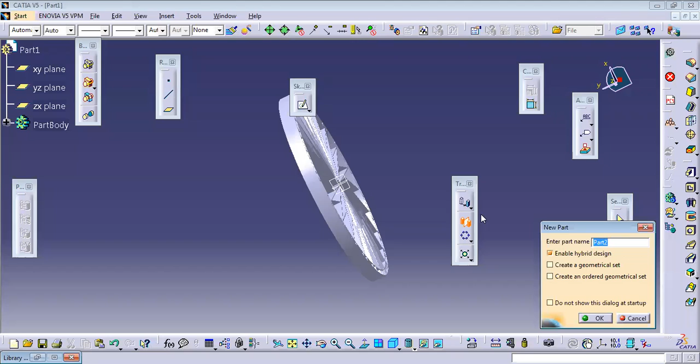What we can do? So let's go for one more diagram. Mechanical design, part design, new part. We'll select any one plane, I'm selecting vertical plane. Go to sketch, and draw one arc-like structure.

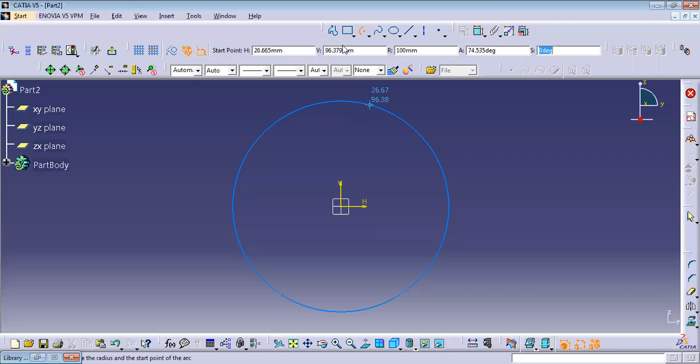Center point. Define the arc, radius let's take 100. You can give your values here. It is 45 degrees, my dear students. Wherever you want, you can place the arc, then complete the profile however you want.

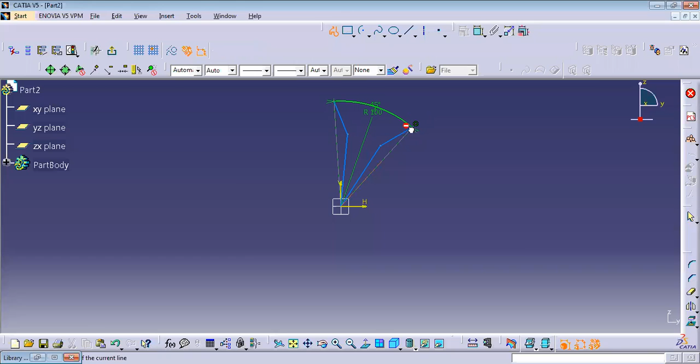Then exit from the workbench. Go to the pad option. Preview, okay, then click this.

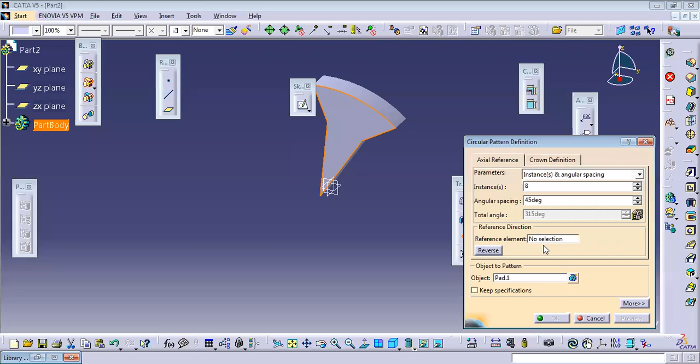Go to the circular pattern. After circular pattern, let's make 45 degrees there. Then 360 divided by 45 is approximately 8. Reference axis selection, you can go for reference axis. Preview, okay, done. So according to our wish, we can do this.

Now, my dear students, so this is circular pattern. Instead of circular pattern, you can also go for rectangular patterns, so go for rectangular pattern.

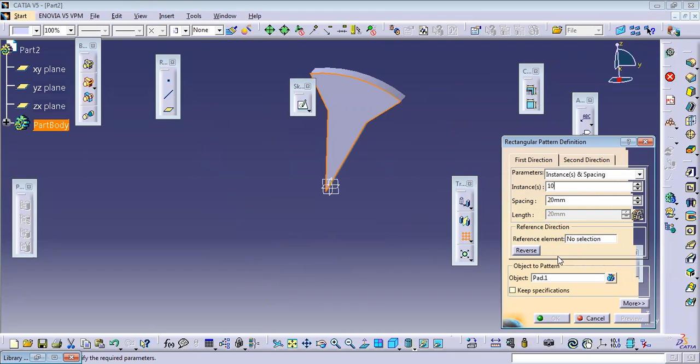How many you want? You want 10, okay go for 10. Reference element, this one you want 10 items. So preview. So 10 items are ready right now. Instead of making one item, 10 are ready. Reverse direction, you can change in this direction. Preview.

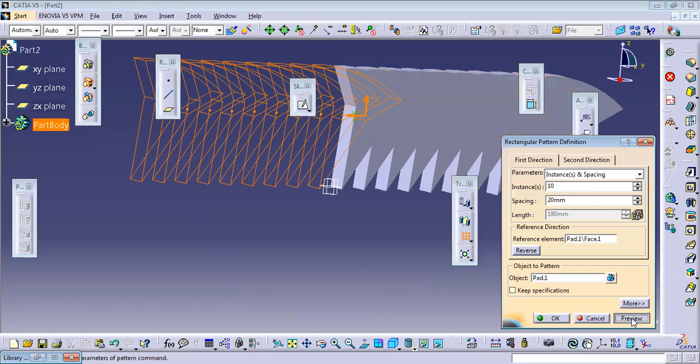Okay, so this is like we can do. Now, my dear students, plenty of options are there. Groove making option is also available, you can use this one. Just try it out whenever you want.

So now I will be going to this table. We'll be discussing about this table. After this, we'll go for assembly.

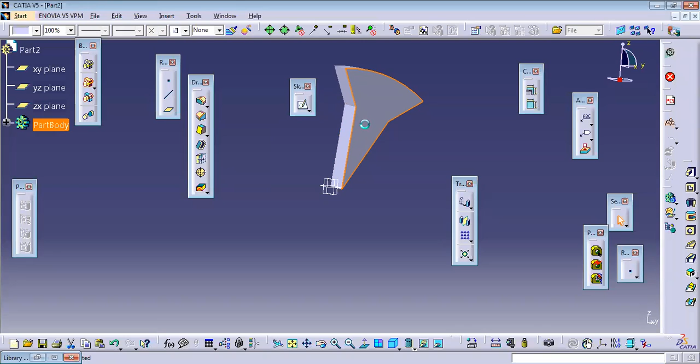Okay, now what I do, my dear students, I'll make one box to get to know the chamfering application. I'll make one box first. Select any one plane, go to the sketcher, make one rectangle of any dimensions. Don't worry about the dimension much right now.

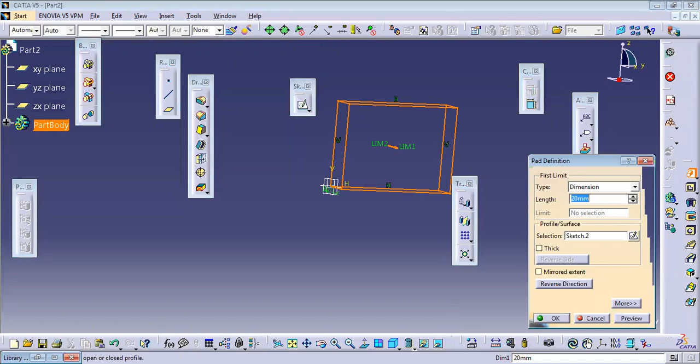Return to the workbench. Pad it, my dear students. Let's go to the thickness 100 mm. Okay, now the box is ready.

Now what you can do here, lot of chamfering options are available. So select this one, edge fillet. What it does is take all the edges. You can select all the edges whichever you want, or you can select any one edge. After selection of this, okay.

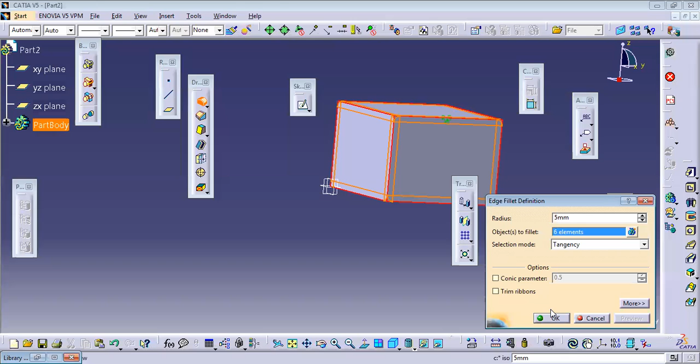So if you want to reduce the sharp edges that are there, you can remove the sharp edge. For example, preview, okay, you can increase the radius of this one. First you go for the preview, my dear students, you will get to know. Okay, so can you feel that one?

What we have done? Can you feel this one, my dear students? What we have done? The cuboid - cuboid is fine, but after making the cuboid, what have we done? The edges, whatever sharp edges we were having, we have removed here. Getting it? Yes sir. So you need to remember one thing: any mechanical component or any automobile component, whenever you are making it, you must remove the sharp edges.

Okay, now there is one more option, my dear students. Again I'll go for the earlier model. After making this earlier model, there is one more option here: chamfer.

What does chamfer do? So let's take this one. You can select any plane. So chamfer, angle 45 degrees, 2 elements, preview. I'll increase this one instead of 1mm, I'll go for 10mm. We can easily feel that.

Okay, so are you observing that one? So what have we done now? Whatever sharp edges are there, we cut them, we did the cut action such a way as corner edge cutting. Let's take one more example.

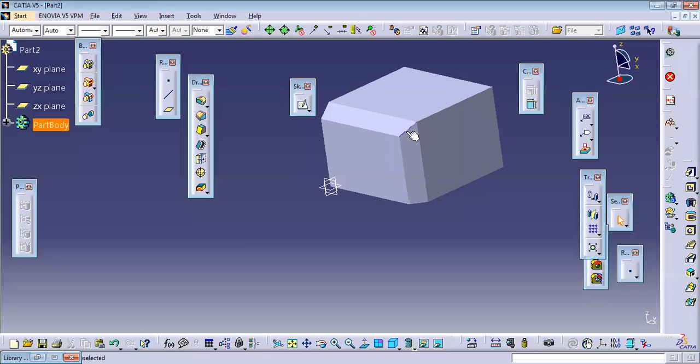I select this plane, I'll go for the chamfer option. I will give, instead of 1, I'll give 5mm. Whatever you want, you can give based on your application. Now, okay. Are you able to get to know what I did here? So this is called chamfering - edge removing, edge removing. Okay.

Fine, now we have one more option. We have one more option: draft angle and different draft angles. One I'll go, so one draft angle I'll go.

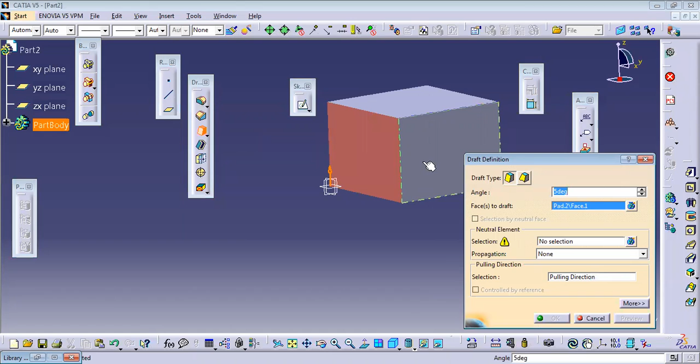So select this one. After selection, select any surface, whichever surface you want. You can select all 4 surfaces here, just by rotating. Then it makes the shape of shape.

For example, you increase that 5 degrees to 10 degrees, so you will get to know. And axis direction is in this. Select the section, so in above direction.

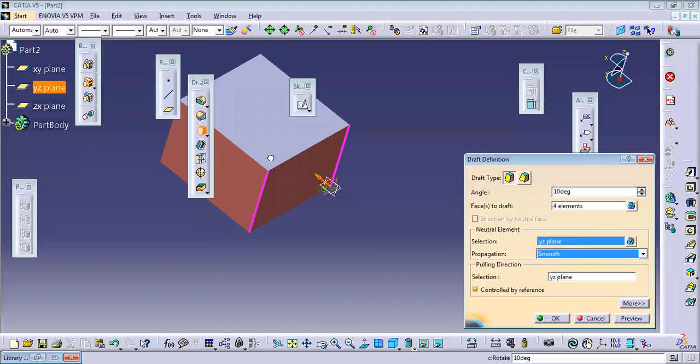Okay, then we preview. Selection, 4 elements are selected, faces to be draft. Now all the 4 reference plane. So select this one, instead of XY plane you select this one. So first 4 elements we selected, and reference plane, base plane we need to select, then go for preview.

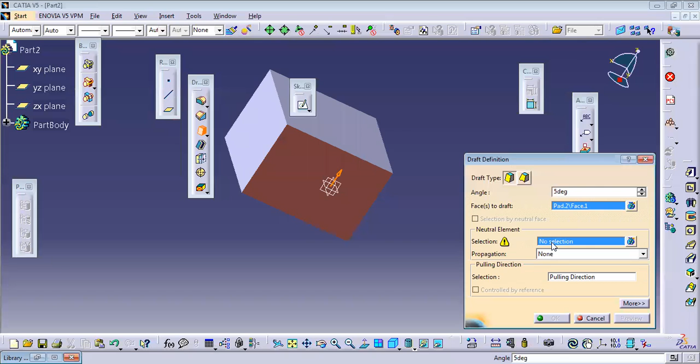Once again I'll go. Okay, one element selection, this element I'll go. Preview. Okay, what happens, 1 second. You already drafted, okay fine. So probably you can observe this one, its cross section has reduced. Tapering achieved. 1 second, I will give more drafting so you can feel that one.

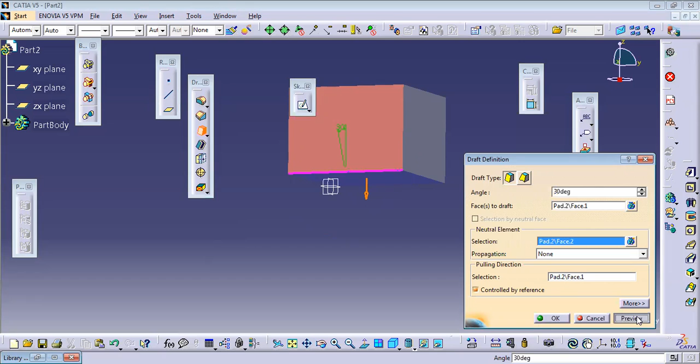Okay, select, you just observe the shape. This is completely vertical. Now what I do, I will select this bottom part, and both part, this part is going to be reduced by 5 degree. Instead of 5 degree, I will give more, 30 degree, so that it is clearly visible for you. Preview. Okay done, so you get to know that, right? So what we have done now, so it cuts the faces.

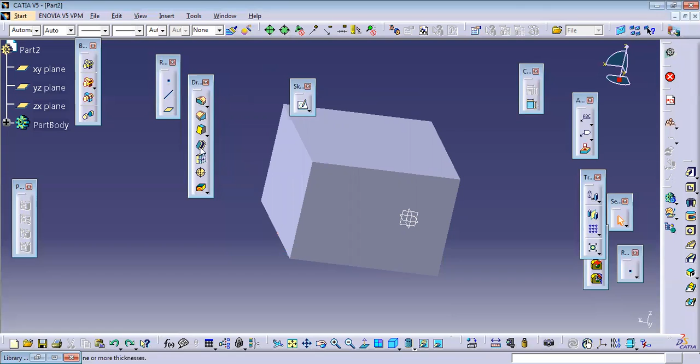Okay, then we have one more option, this option. This is shell making. Shell making is nothing but bucket-like structure making. For example, you take this one, select this one, faces to be removed. You can select any one. All if you want, you can select all. So it's better if you selected one only.

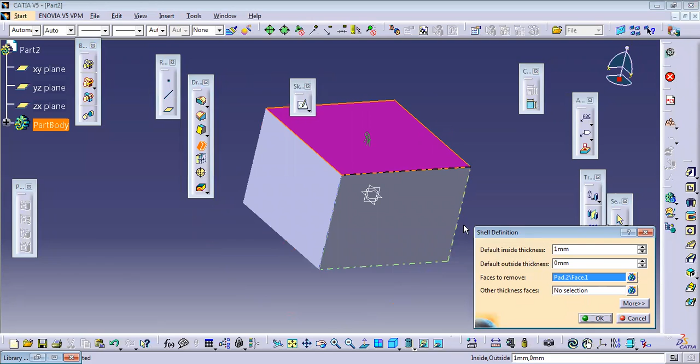One. Okay, you select any surface, go for preview. Then automatically we can get the hollow section. Select any one plane, and that makes the thickness of 1 mm. Why 1 mm? We have given 1 mm. 1 second, I will show.

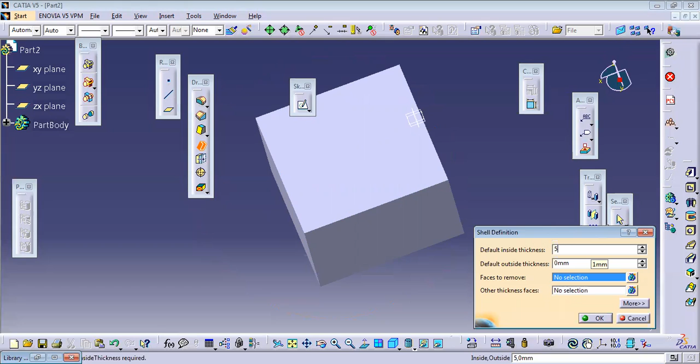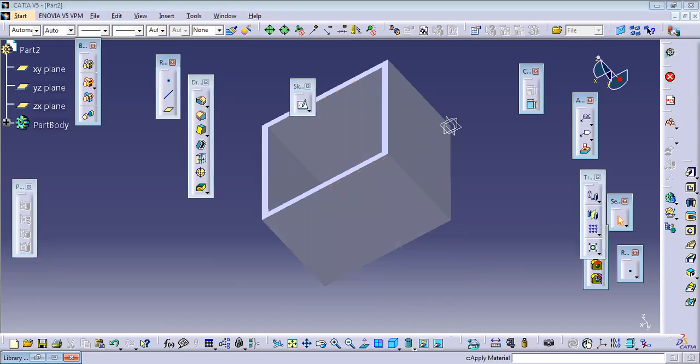So select this one. After selection, shell options, instead of 1 mm I am giving 5 mm. Faces to be removed, these faces I'm going to remove. You can select any one plane based on your application. Now you can fill this one. If you want, you can give the material also for this, currently material option is not working, but you can give the material also.

Now there is one more option, this one, thickness. If you want to increase the thickness of this to more than 1 mm, just 10 mm for only this particular wall, you can give now. So how we can give? There is option, thickness option. Click this, after clicking you select any surface and give the dimension 12. Okay, 12 mm thickness is achieved.

Okay, like this, if you start working on this you can do whatever you want, whatever the shape you want. You can make the bike simple component I have explained here, but you need to go for any. You can make the bike chassis, you can make the wheels, you can make all the components.

Okay, one more thing I am telling you. For example, now I want to make one vertical surface but inclined. For example, what I do first, I create the plane. So look at here, one more option, plane. This is very important.

So select this option, look at this option, wave here, I'm using this one. Now important is plane. Plane option, whenever you select this plane, there are plenty of plane options available: parallel through point, angle normal to planes, through 3 points, through 2 lines, through point and line, through planar curve, tangent to surface, normal curve, equation, mean through points. All are there, you can try all.

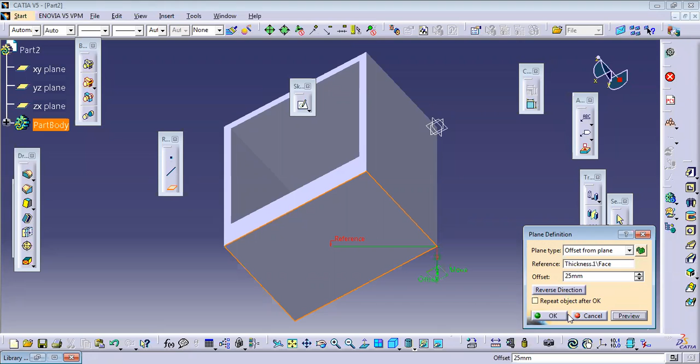Now okay, now one more plane has been created. You can use this as a reference and you can go for the sketching. So how I will tell you. Now one more plane is selected. Draw any component you want.

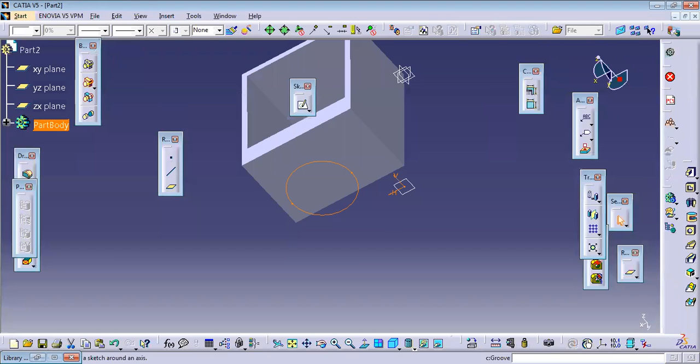Wherever you want. Exit from workbench. When you exit from workbench, you can go for the pad option or cutout option.

Preview. So not only these 3 planes, we can create any number of planes. For example, here you can create the planes. Let me know.

Here you can see whether it is possible or not. Now create the plane. Angle normal to the plane or parallel through point.

So you can select any one. Normal to the curve, I have selected. So curve is available here. Okay, curve is available. Point is not available.

You can make the point if you want. Here, one point you can click. So point is available. Now on which point is created, then plane, reference offset plane. So what I'm selecting, normal to the curve, I have selected here.

Okay, and point, if you want already drawn point, somewhere it has gone. So once again I'm drawing point, my dear students here. Okay, fine. So point is available here.

You can observe here plus mark, point is available. Okay, now draw the plane.

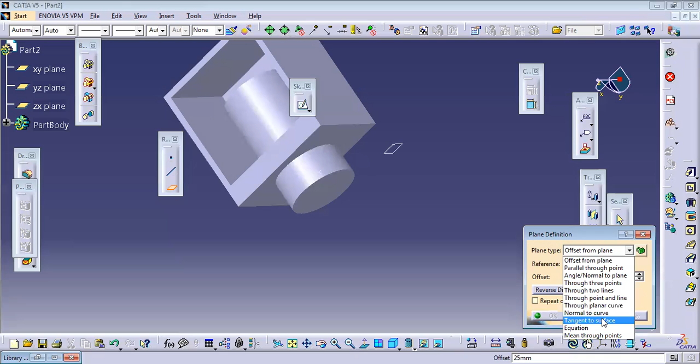Curve, normal to curve. So reference surface, point you want. You can select the point. So point is ready and preview the point.

Now what is the use of this point curve? So this plane we can take as a reference, we can draw. There are some complex mechanical shapes available. For this, this tool is going to be helpful.

For example, let's sketch on this plane. So plane is available. Draw one more circle wherever you want. You can give a radius

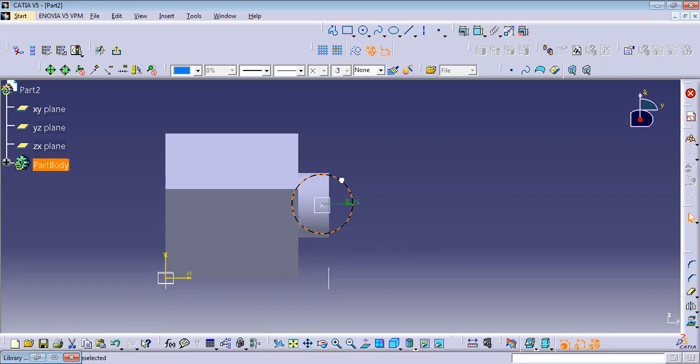25. You can give one radius of 25 too. Okay.

Then return to workbench. Return to, you can use the pad option or cut option. I'll go for cut option now. Preview. More than 100 mm we can give. Reverse direction you can select.

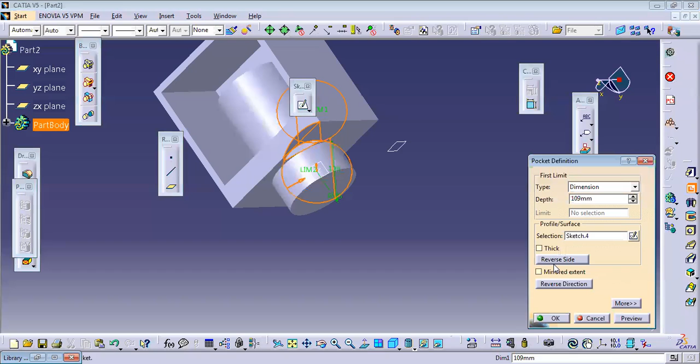So this plane has helped us to make the plane on this surface. So this is one of the options. So these are the fundamental options, my dear students.

You can use any number of operations, even Boolean operations are available. Mirror option is available. So mirror option already informed you. Let's go for mirror option.

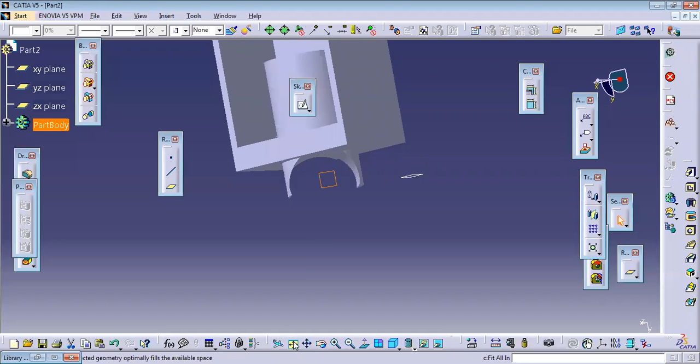So there is a mirror option, my dear students. You can select the mirror option. Select the component distance, how much distance you want. 3 mm distance. Okay, 24 mm distance I have given.

So fit to screen. So it has to be done. Oh yeah, I don't know why it has not done. So what, once again I will use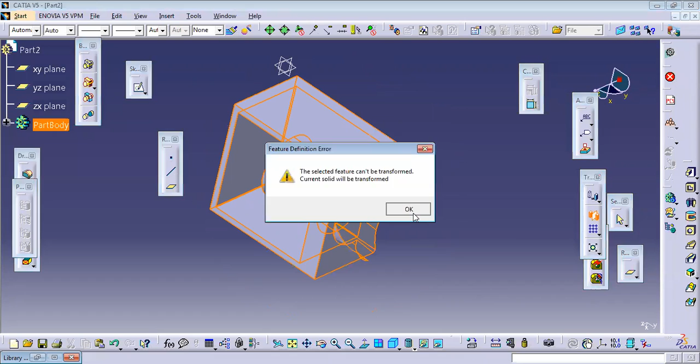mirror option. Mirror option. Okay, this is a transformation option used. Mirror option. Select this component. Select the component. Mirror option already done. First you select this component, then mirror option.

So immediately we have done the same component too. Before assembly, my dear students, suppose if you want to change the pic, if you want to take the picture. Okay, so image.

You can make, image is available. Capture it. After capturing, after selecting, we get this option. Click this one. Our image is going to be generated.

Whatever we have. Again, in image there are plenty of image type options available. You can use those things. See, left corner you can check that one. Left corner you can check the image is available, you can save it.

Okay, is that okay? Are you listening, my dear students? Are you listening? Yes, sir. Okay, yes, sir.

Fine. My dear students, along with this, for example, there are plenty of crazes as well. For example, few students make a video of their component making. If you want to make the video, again go to the tool option.

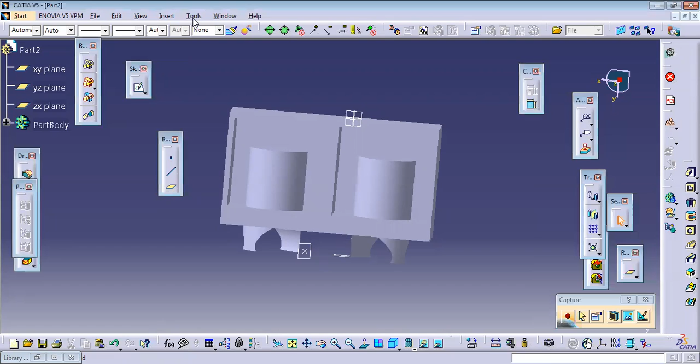Again go to the tool option. Okay, image, there is album available, video is available. Click on video, you will get one more video recorder available. Click on video recorder, and you start making the component whatever you want.

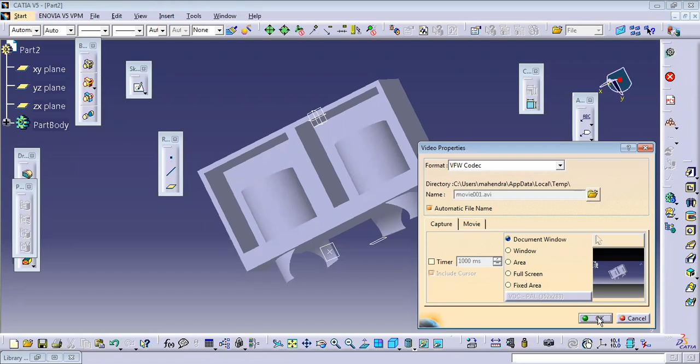You just work on the screen, it is going to be recorded. Okay, then stop it, automatically it saves in your drive. It gives options: Windows complete area, particular area, full screen, fixed area. You can select any one and click OK. Complete screen, or only component screen, or only CATIA screen - it asks the question like that.

Fine, my dear students. Now what I will tell you is that we need to do assembly. So after making components like this, you can make any n number of components.

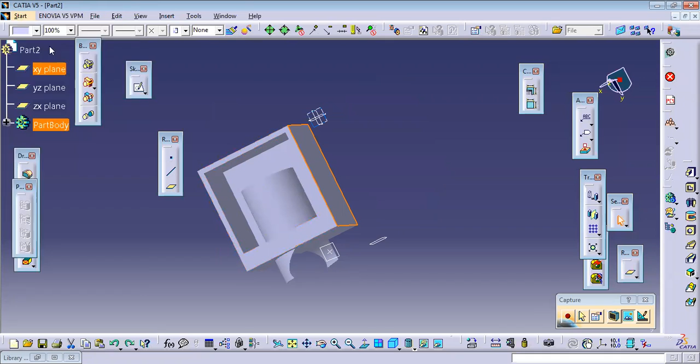Okay, new part I have done. I am going to do the new part. So while making the part, my dear students, reference plane is an important parameter - the same plane you are supposed to select. Now I am selecting the horizontal plane, I am doing that one. First, what I'll do is make the ring-like structure.

Okay, one more thing - return from workbench. Then pad option, increase the dimension by 20 mm. Okay, next select this one. I'll go for one more time, the sketch option.

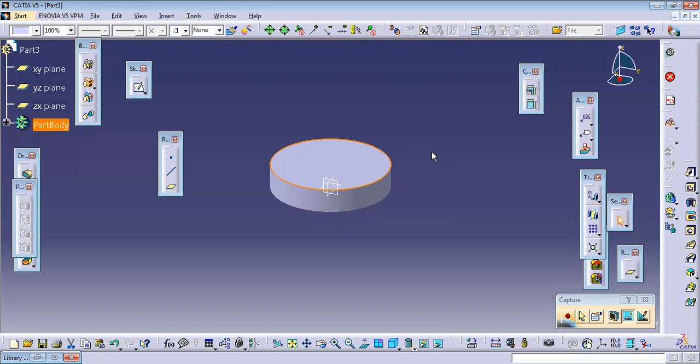Sketch, then I'll cut this one. I'll pick the dimension as radius of 35 mm. Remember this, radius of 35 mm. Actually, let's reduce it, let's make it 25. No wait, let's keep it at 35.